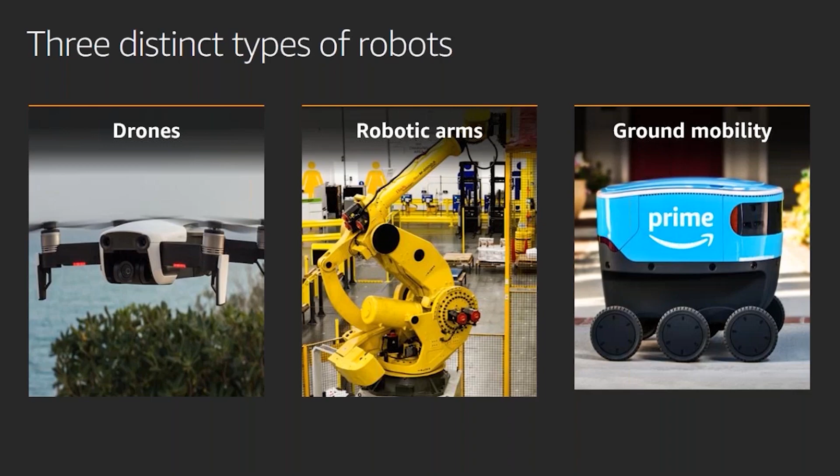These ground mobility robots, this is what's really interesting to us. And we're actually at an inflection point. The expected growth in the use of ground mobility robots is expected to increase by almost tenfold over the next 2 to 3 years. And this is a trend that's been going on for quite some time now.

In fact, by 2023, it's estimated that mobile autonomous robots will emerge as the standard for logistics and fulfillment processes. And it's not just fulfillment. By 2030, we actually expect 70% of all mobile material will be autonomously moved by robotics.

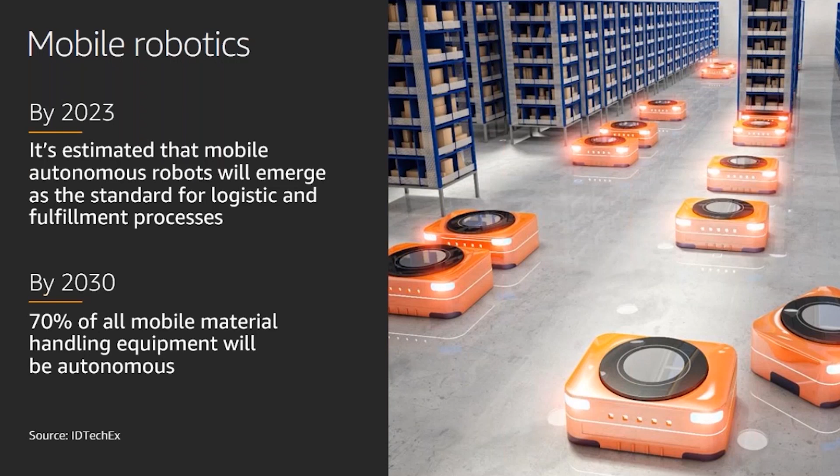You might ask, what's driving this? Well, over the last 2 decades, we've actually seen the cost of labor increasing year over year. But at the same time, the cost to actually build a physical robot has been plummeting. A LiDAR, which 10, 15 years ago may have cost tens of thousands of dollars, can today be purchased for less than $1,000. And the algorithms to process data for navigating a robot are often now using just very inexpensive cameras under $10. So the economics has been a huge driver for this.

And indeed, as noted by Goldman Sachs in 2017, we hit an inflection point where the price of a small robot for moving material around was actually cheaper than any labor anywhere else in the world. So we've actually really met a crossing point where robots are cost effective and there's strong economic drivers for them.

And indeed, there's a survey of enterprise companies, top 550 enterprise companies, asking them, what are your top 5 reasons for deploying or planning to deploy robots into your operations? If you look at the top 3: it's to improve productivity of their employees and the efficiency of their operations; second, to improve the product or quality of their product using robots and automation; and finally, to increase the operational efficiency of their facilities through the use of robots.

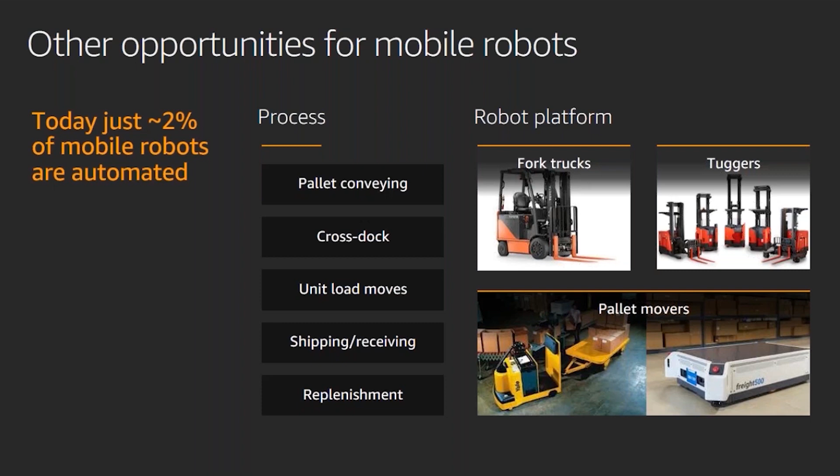And that's why the upside potential is so great for the increased usage of mobile robots, as well as further automation in the enterprise for moving and fulfillment in warehouses.

So today, we look at the history. In the past, we were manually moving materials around. Today, we see a blended model where humans, in concert with robots, are actually moving materials. If you look at the future and imagine when we go from 2% to 20% to 50, to perhaps 100% of robot automation, it's a very compelling future ahead of us.

And again, the takeaway for this section: economics is a significant driver in the use and uptake of automation.

Second is to improve worker productivity, offer customers new services, and increase operational capacity. And there's customer demand for new experiences.

If you look at Amazon, a few years ago it was a game changer to have packages delivered in 2 days. Now, working with robots in concert with humans, we're able to fill orders within a single day. And with innovations in Prime Air, we could actually be delivering packages within hours. Customers want these new experiences that can be delivered through automation.

Now I'd like to talk about the role of the cloud in the future of robotics, through examples of our customers using AWS RoboMaker. AWS RoboMaker launched at reInvent in November of 2018, and there are 3 capabilities I'd like to highlight in my talk today.

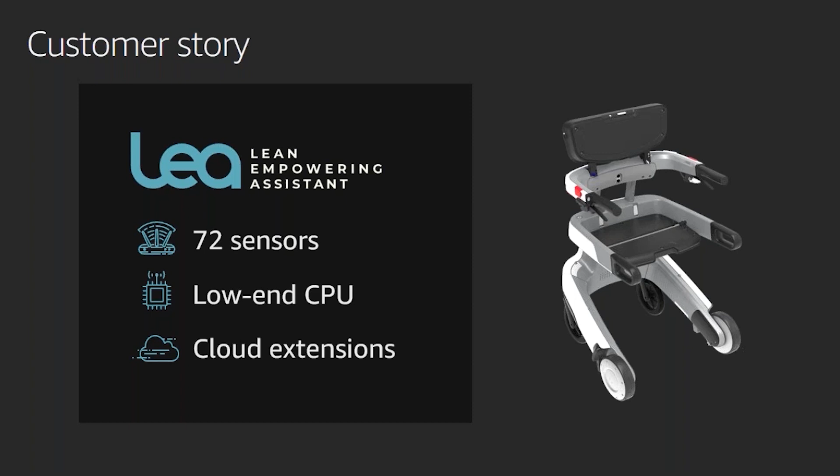LEA's developers wanted to add a voice interface so customers could interact with LEA in a more natural way. They wanted real-time monitoring of their patients, as well as live video streaming so a doctor or a loved one could converse with the user of LEA.

The challenges the team faced: they had very little expertise on cloud services or machine learning, limited local compute power on LEA because of the low-end CPU—all of which was being used to keep the patient safe—and limited engineering resources to throw at this problem.

We worked with them to integrate AWS RoboMaker cloud extensions into LEA, such as Amazon Lex, which allows the user to talk to the robot, and Amazon Polly, which generates voice from data, turning text to voice. Now you have bidirectional communication between the robot and these cloud services.

Amazon Kinesis Video allows us to stream video off a robot up to the cloud for processing or storage. Amazon Rekognition uses a deep learning model to recognize objects in the video feed coming from LEA.

And finally, Amazon CloudWatch, where you can stream monitoring data and logs off the robot up to the cloud and build dashboards for monitoring the patient and their activity.

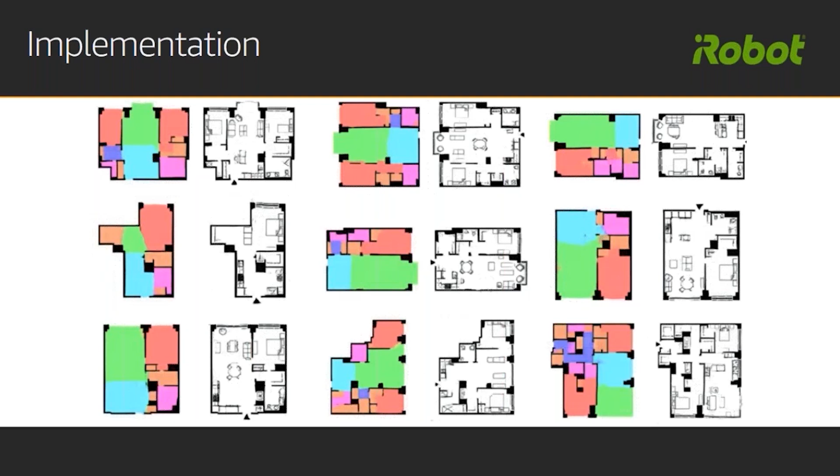What they wanted was a large-scale automated testing framework using our simulation service. We worked with them to create dozens of simulated environments, different floor layouts, different home types, different configurations. Today, they have 40 automated tests that run each time a developer attempts to check in code into a repository, to verify the application's running correctly.

Whenever the developers attempt to push a new update out to their customer's robot, they run 500 tests in simulation to verify the application is going to run correctly as desired. And they've actually been able to reduce their testing time down from 3 weeks down to 1 hour for one important test case that they're trying to protect against. So this is a significant game changer for them.

And in fact, many of you who have been using AWS DeepRacer have actually been using RoboMaker simulation all along, because there's another use for simulation as a service: to actually use reinforcement learning and simulation to train a robot to perform manipulation and navigation tasks.

In DeepRacer, we start up simulations of different track configurations, different track conditions, and an intelligent agent is actually attempting to drive the vehicle. Reinforcement learning is capturing all the mistakes that the vehicle makes, giving it positive and negative reinforcement. The machine learning algorithm improves the performance of the agent, effectively training it through simulation how to actually drive a car.

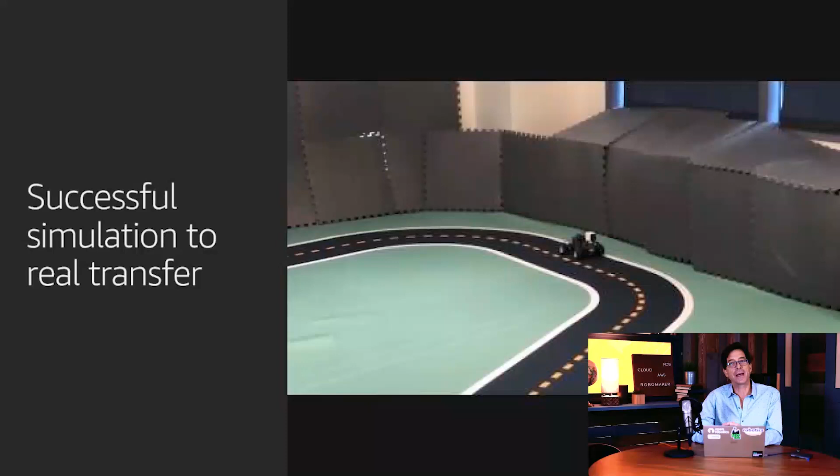And then we can actually use our fleet management to deploy that reinforcement learning agent to a physical vehicle, where it is actually able to drive the car using that agent in the real world for the first time. Now, as you can see, this car is still in its learning process, because teams who win DeepRacer events are able to go around this track in 6 seconds. So it still has a lot of learning left to go, but you're now seeing the application of simulation and reinforcement learning to program robots.

So if you pan back and ask what is the role of the cloud in the future of robotics: we can see, in the case of LEA, intelligent cloud services can enhance the local processing on the robot and improve the performance of a robot over time. We can use simulation, such as what iRobot has done, to test application correctness and ensure performance across a wide range of conditions, ensuring the robot will perform correctly in the physical world. And finally, simulation combined with imitation and reinforcement learning can actually be used to program robot actuation and navigation.

So now I'd like to turn it over to Brian Gerkey to discuss the development of software that runs on the physical robot itself. Thanks, Roger.

It's a real pleasure to be here and to be part of this Cloud Robotics Summit. So I'm going to tell you about the software tools that underlie the service that Amazon has put together with RoboMaker. They are namely ROS, the robot operating system, and Gazebo, robot simulation. These are both open source tools that we, together with our global community, have been developing and maintaining for well over a decade now. Now you might ask, why do we write robot-specific software?

So how does all this stuff really get used? I'll show you a few use cases of projects that we've done. And I should say there are many, many more applications out there that our broader community has used.

So what I'm showing you here is a project that we did together with NASA Johnson Space Center, in which we simulated their Valkyrie humanoid robot. And here what that robot is doing is planetary habitat preparation in advance of a human mission to Mars. So the robot is tasked with a number of jobs in order to get the habitat ready for humans to come.

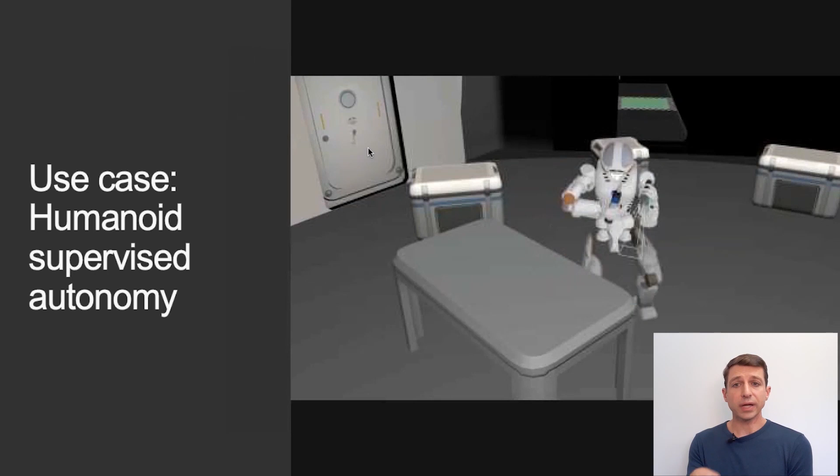This was set up as what's called an eyes-off teleoperation task, or supervised autonomy. So in this case, there's a human who can see through the sensors that the robot has, but with a significant lag, because of course this robot's supposed to be on Mars, and then is able to send commands to the robot to get it to do these tasks. So these tasks that you're seeing are not completely autonomous. They rather have a human in the loop, which is very common for robot applications.

And this is the example where the winner of this simulation-based competition that we ran was able to take the code developed in Gazebo and make it run on the actual physical robot in the matter of just a couple of days.

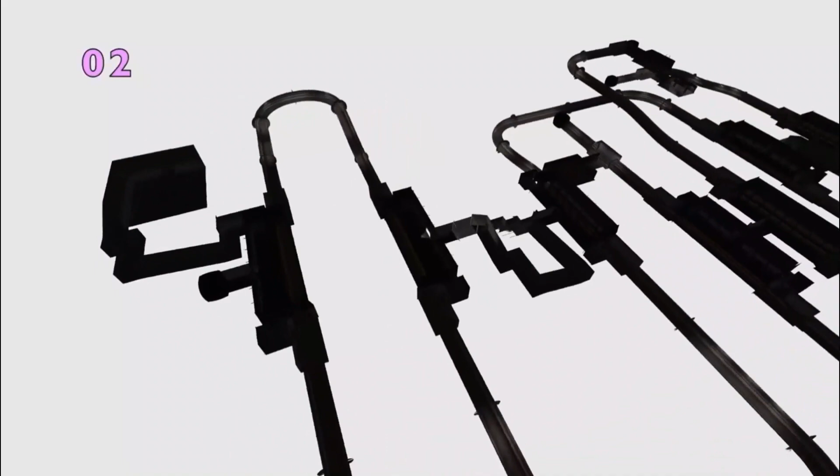Another example is a project that we're currently doing together with DARPA. This is called the Subterranean Challenge, or SubT. This is another competition environment in which the competitors are programming robots to go into underground environments to do search and rescue tasks. In this case, we have not one complex robot, like in the case of the Valkyrie humanoid, but rather a large team of simpler robots. These are wheeled robots, also aerial vehicles, and sometimes legged vehicles.

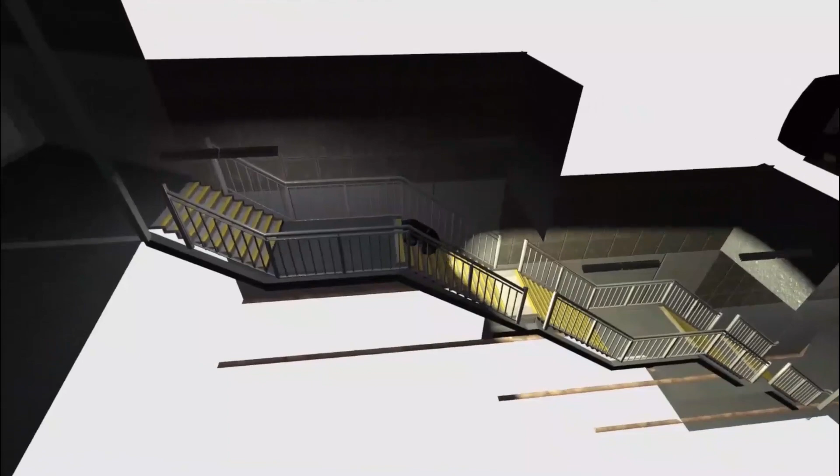And in this case, what the teams need to do is to program these robots to run through these environments, searching for artifacts, such as they could be humans who need rescuing, they could be backpacks, and there are a number of other artifacts that are to be found. And here you can see some of the latest work that we've done in modeling large environments that are in low light conditions. So we've got vehicles carrying their own lights, and also the ability to do multi-robot simulation, which is important for a lot of applications, not just search and rescue.

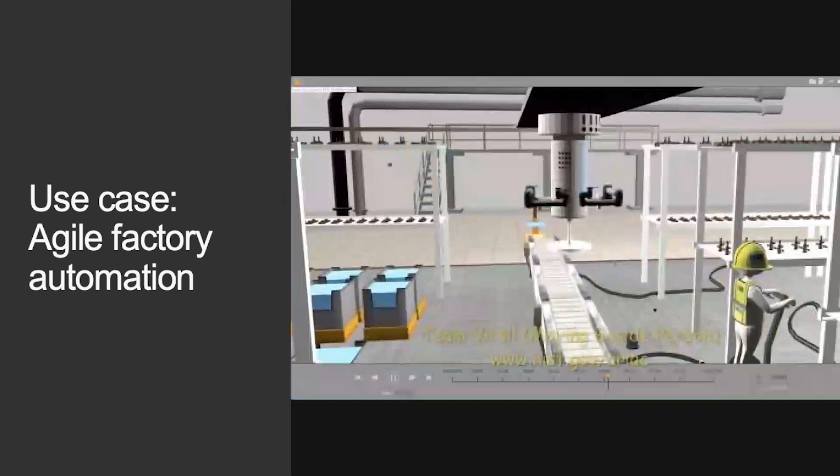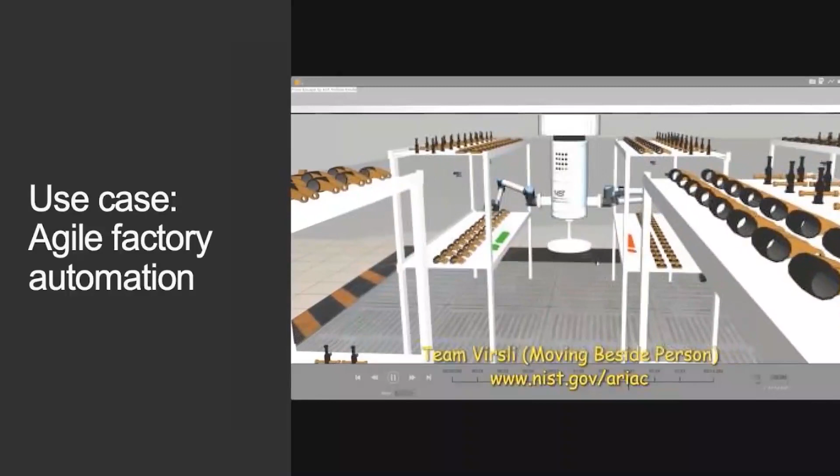One last application that I'd like to show you is actually one that we worked on a couple of years ago, but that has now been taken on completely by our friends at NIST. This is called ARIAC. This is a simulation-based competition to control robots in industrial environments with the particular goal of improving the agility of the robots. Not the physical agility of them, but rather the ability of the robots to respond to unforeseen circumstances.

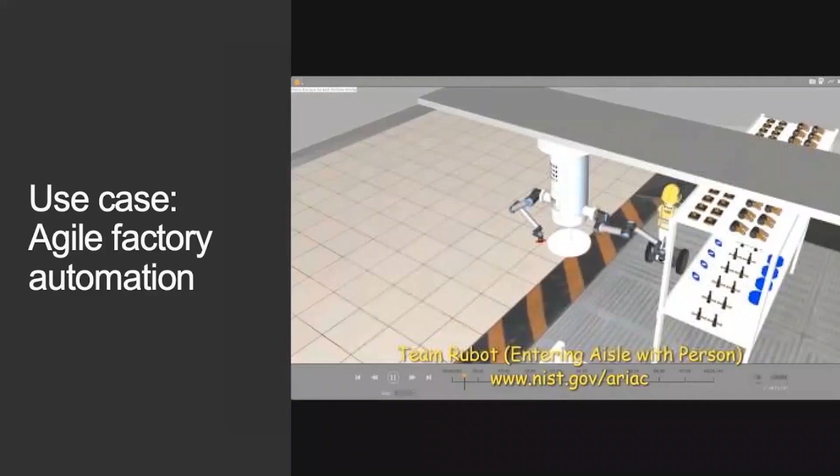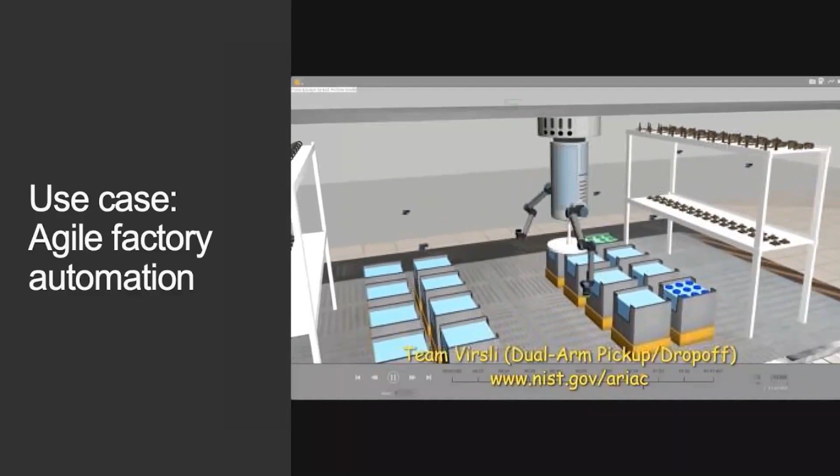And it's quite common that robots are used in industrial settings these days, but they tend to have very little tolerance for unforeseen events. So if something unexpected happens, at best you would hope that the robot just stops. The goal of this competition is to have the robot be able to, on the fly, autonomously react to these unforeseen circumstances, whether that's it tried to pick up a part and the part dropped out of the gripper on the ground, or it delivered the part that was requested, but the QA system says the part was faulty and so you need to go get another one.

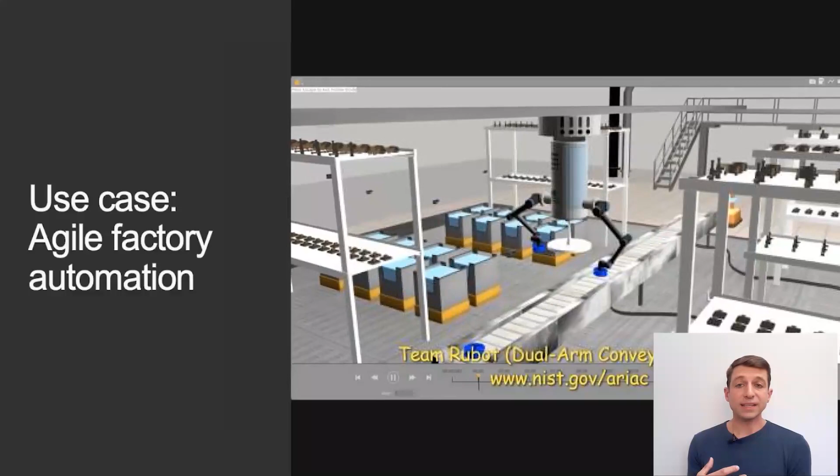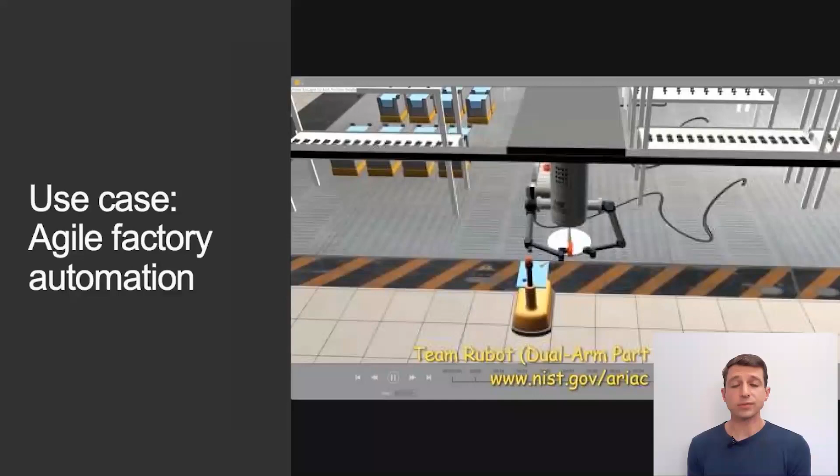These kinds of events are baked into this competition, and then the competitors have to write their application software to be able to autonomously control this robot and handle all of those unforeseen circumstances. So this is a nice example of how you can use all this software in an even different third domain.

So I've shown you three very different application domains, but a common theme that runs throughout them in developing these simulation environments is that it's very labor intensive to develop all of the worlds. So whether it's a Martian environment, a factory, or an underground network of tunnels, it requires a lot of effort to build those environments and let them have all the detail that they need to be able to run robots through them and get useful test results.

Even with good tools and talented artists, you just never have all the environments that you really want in order to do large-scale testing. And in the end, that's what we really want people to do with the simulation software - the kind of large-scale testing that gives them confidence that their applications are performing the way they want.

Before they deploy them to hardware. So what we really need is automation that can help with that, where we can specify approximately what we want in the environment, and then have automated generation of massive sets of environments that match those criteria that we can use for testing.

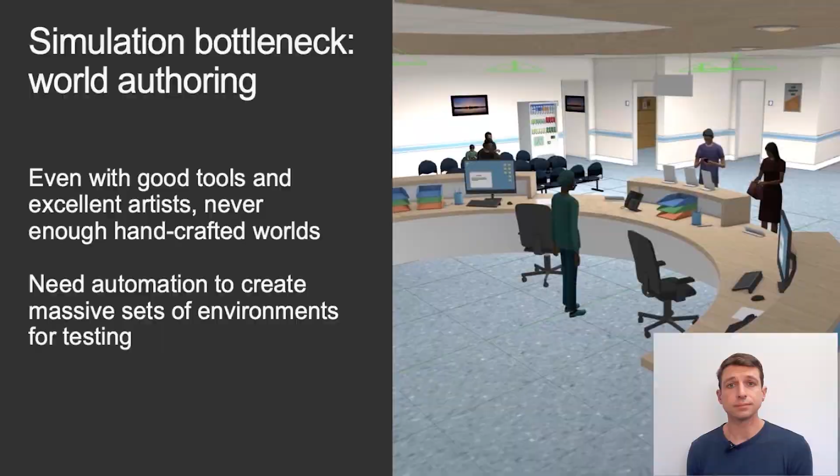And that's what Roger's going to tell you about now. Thank you, Brian. As you just heard, creating a simulation world can cost tens of thousands of dollars and take countless hours away from a team just to create a single simulation world.

We're pleased to announce today the availability of AWS RoboMaker WorldForge. WorldForge is a new capability of AWS RoboMaker that enables our customers to build a simulation world in minutes. Not just one simulation world - they can build tens, hundreds, or thousands of simulation worlds in minutes so they can test their application across a wide range of scenarios.

We're initially launching WorldForge focusing on indoor ground mobility robots operating in homes. But over time, we're going to expand WorldForge to other world types to create simulation worlds for other buildings and other facilities. Here, let's take a look at WorldForge.

Introducing AWS RoboMaker WorldForge, a new capability that makes robotic simulation easier. AWS WorldForge makes it faster, simpler, and less expensive to create a multitude of 3D virtual worlds to simulate your robots in. Robotic companies are building increasingly sophisticated robots with autonomous capabilities and artificial intelligence.

To develop these capabilities, developer teams need simulation to test and train their robots. Scaling simulation unlocks the ability to make regression testing more robust, reinforcement learning faster, and synthetic data generation more affordable.

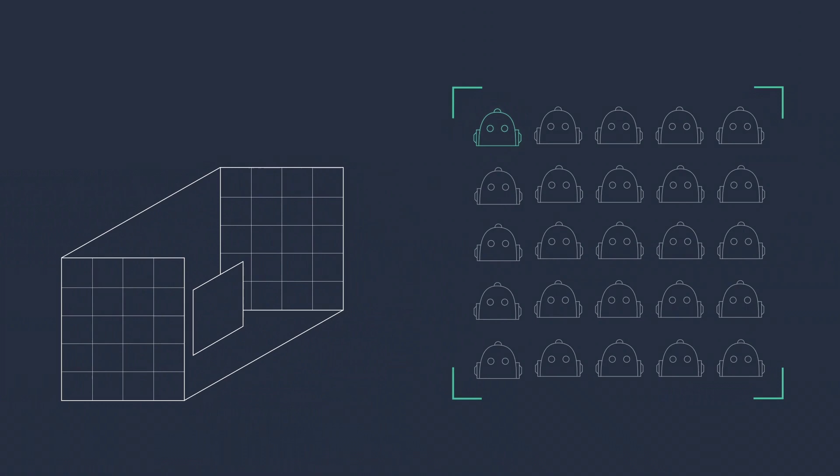With WorldForge, robotics developers can easily increase the scale, speed, and variance of simulation, improving the quality of production code and accelerating time to market. In this demo, we'll show you how to create dozens of randomized, realistic simulation worlds automatically.

Before you generate worlds, you define your environment template, which will be used to generate randomized simulation worlds. WorldForge makes it easy to customize the assets in your worlds and set variation parameters of your simulation worlds.

Starting from a pre-made template, you define the number and type of rooms you want and specify the room's area and ratios. You can customize a room type, layout, and even say which rooms will be next to each other. Finally, in the room itself, you can choose custom floor materials, wall materials, and furniture types.

After the template is defined, QA engineers and robotic developers can easily generate multiple randomized simulation worlds for different application testing and reinforcement learning scenarios. Now I'll show you how easy it is to generate worlds.

First, define the number of variations needed for the floor plan and the interior variations. Then simply click Generate the new world and create. Look at that! We generated 50 worlds based on the parameters in the template.

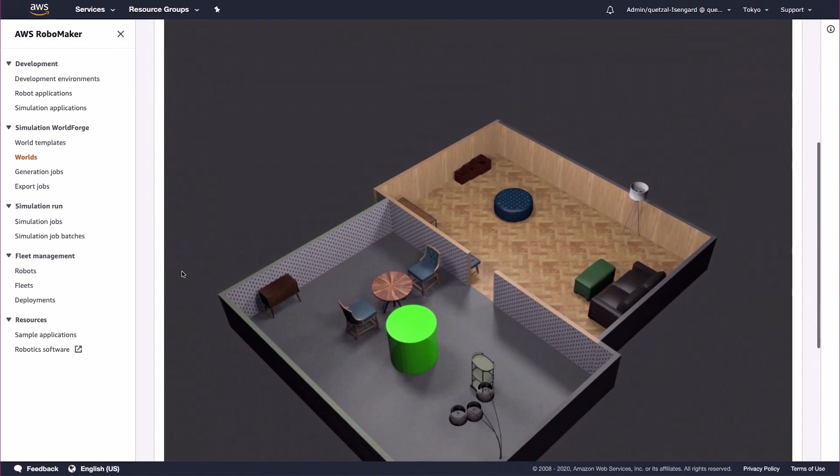Notice that each world is a variation of the template. You can tag these worlds with metadata so that you can easily search for them later. For example, you could tag a world with 3BR for 3-bedroom, hardwood floor, or even high-density furnishings.

You can also use these worlds paired with RoboMaker's Batch API and highly scalable infrastructure to quickly and easily run large-scale simulation workloads. We're really excited to make it easier and faster for robot builders to create simulation worlds so they can do more testing, better testing, and bring their robots and features to market faster.

We are excited about how WorldForge will help our customers improve robotics application testing and machine learning capabilities through simulation. In the session following this one, you'll hear from Ray Zhu, lead product manager of AWS Robotics, and Sam Gundry, the lead engineer of WorldForge, and they'll go into more detail about WorldForge's capabilities and show you how it works.